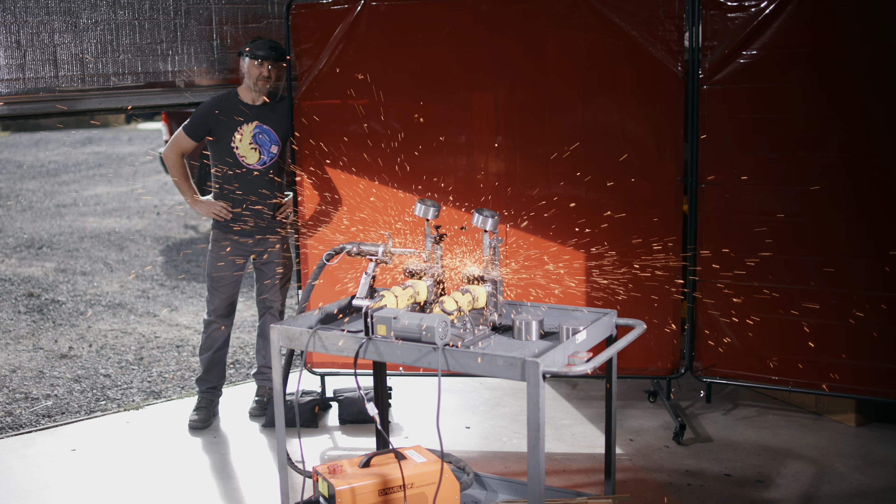This is my Disc Destroyer. It's a mean little machine with one job: testing grinding discs. With so many grinding discs and countless reviews, it's hard to separate fact from fiction.

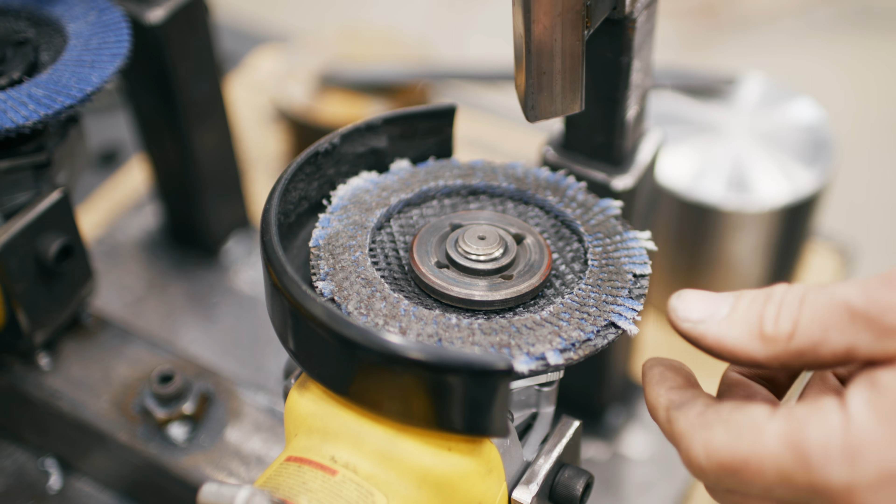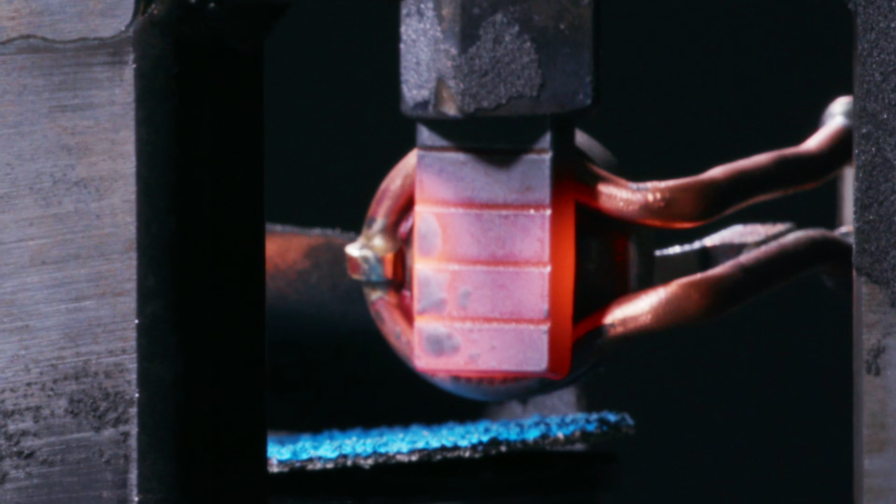This is where the Disc Destroyer comes in. It cuts through the noise, delivering real results. No bias, no sponsorships, just cold hard tests. Grinding discs can face a lot of real-world challenges, like high and low pressures, hot and cold materials, and of course, fast and slow speeds. This machine tests it all, so that we can finally find the truth in the reviews.

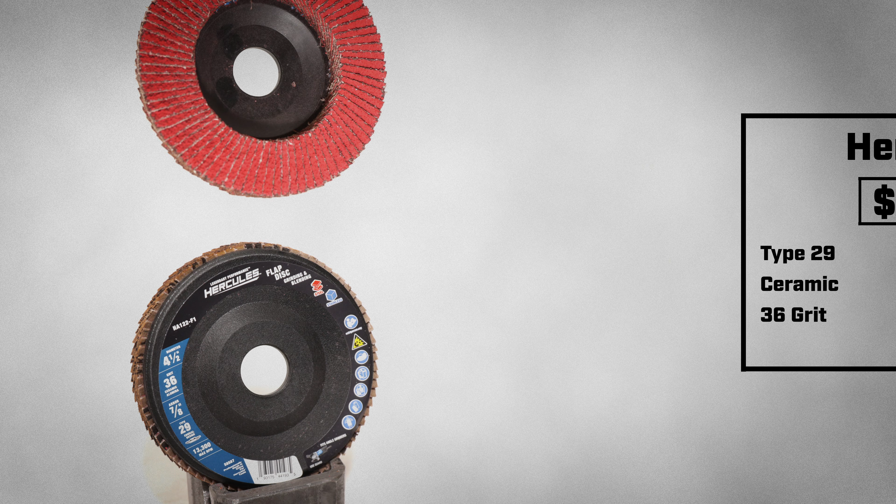Today, I'm testing the Hercules Type 29 flap disc, coming in at $9.99. This is a premium-priced disc. It has netted a wide range of reviews online. Satisfied customers praise its durability and effectiveness. This reviewer gave the disc 5 stars, saying it lasted a good long while and cut quickly.

But critics of the Hercules say otherwise. This unhappy buyer says their disc wore out very quickly, and this reviewer says it didn't last nearly as long as they expected. So which of these reviews are fact and which are fiction? Let's test them to find out.

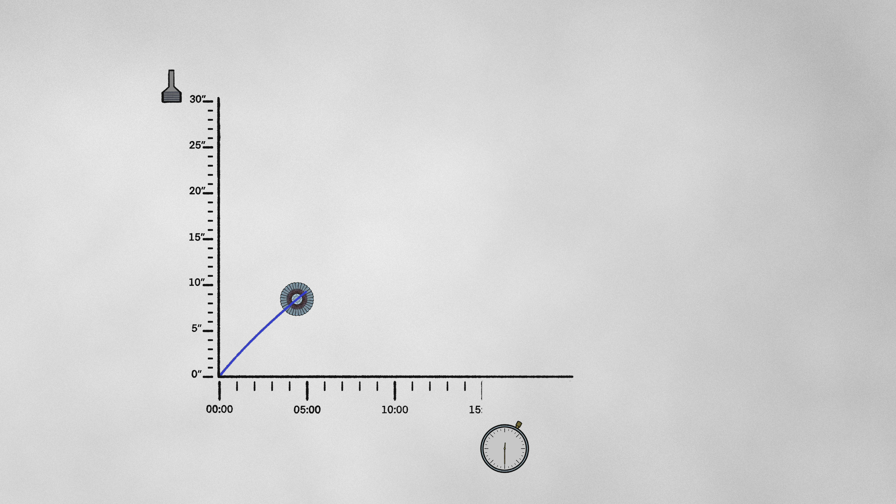Let me break this down for you. Each disc will be grinding this test bar to see how much it can remove within 20 minutes time. This will chart out its story and tell us exactly how this disc behaves based on how much material it removes at any given point. But if the disc stops effectively grinding the bar or just straight up disintegrates, the test is over.

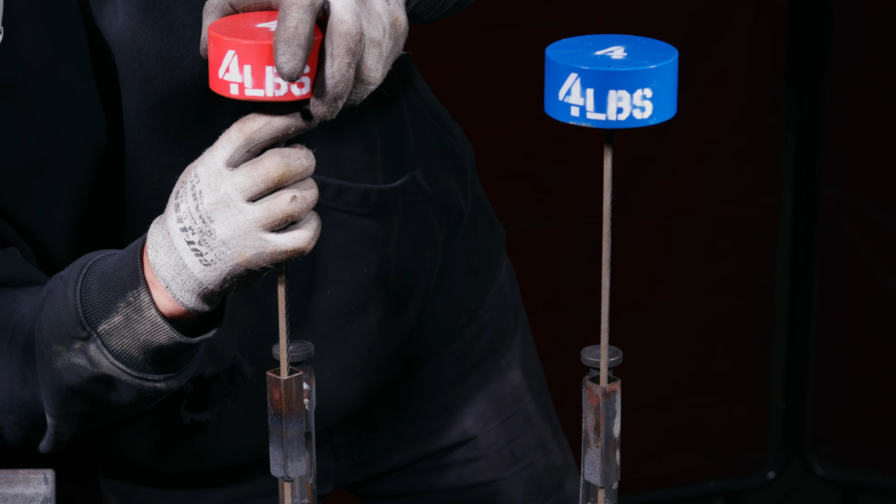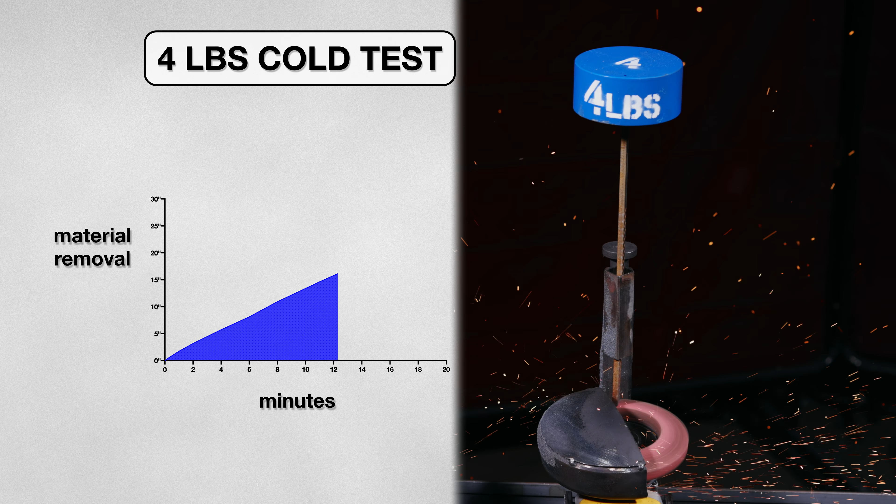Let's begin. I kicked off my first round of tests by simulating light pressure grinding. I achieved this with a 4-pound weight, which is roughly the weight of a grinder. And these conditions gave some very impressive results. The Hercules disc really lived up to its name, surviving the entire 20-minute test window and showed absolutely no signs of slowing down. At the completion of the test, I took a look at the coupon and measured a whopping 25 inches of material removed. These results align nicely with this 5-star review.

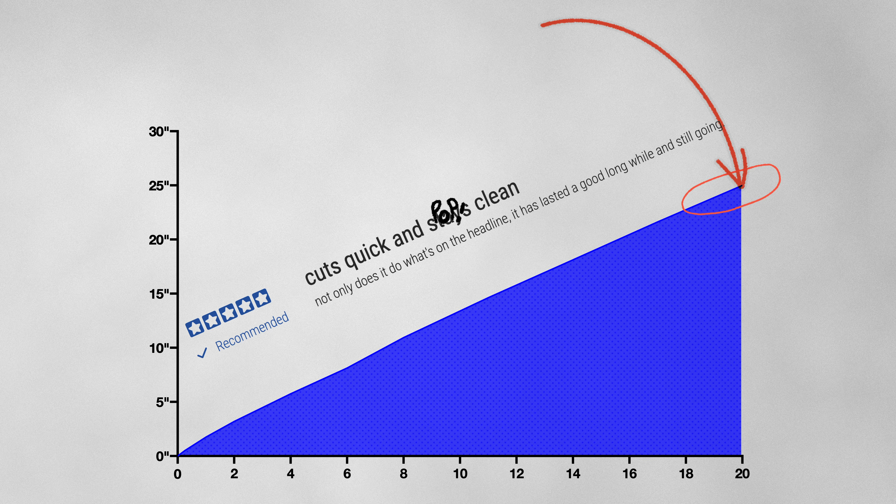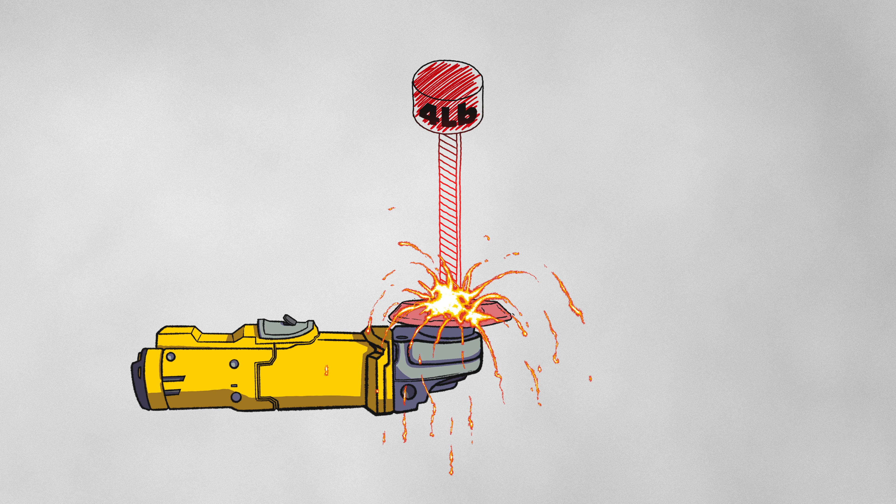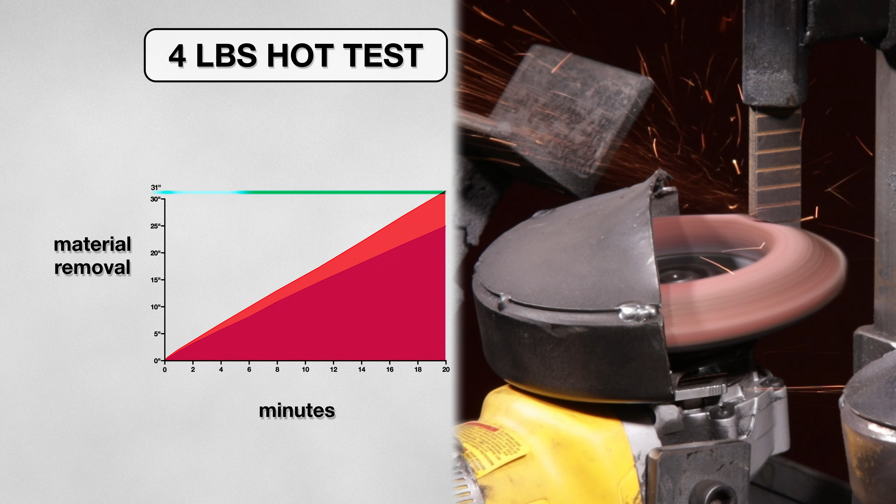However, some reviewers were seeing much worse performance out of this disc, and I want to try to replicate this. One factor could be the temperature of the material. A hotter metal could make grinding easier. It could also increase the temperature of the disc, causing smoking. To test this, I heated the first few inches of the coupon. And yet again, the Hercules powers through like it was nothing. The disc did even better this time, going off the chart, removing 31 inches of material over the 20-minute test. It seems hot metal actually helps this disc.

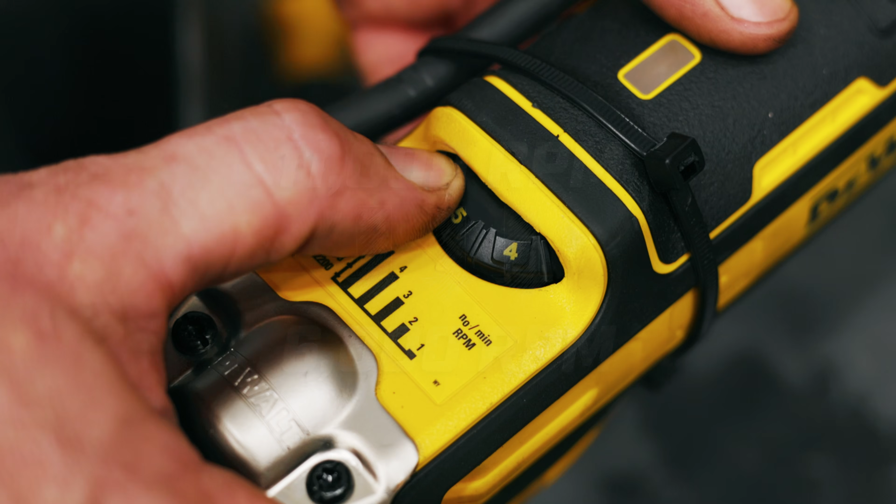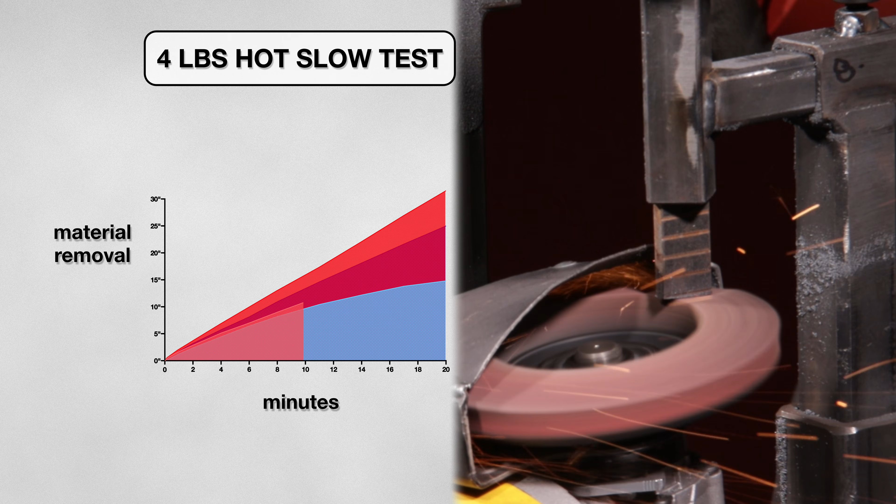Another factor in poor performance could be grinder speeds. To see if this is causing those 1-star reviews, I dropped my speeds from 11,000 RPMs to 6,000 and began my next test. And this proved to be somewhat true. At slower speeds, the disc cut at half the rate compared to previous experiments. Yet, its durability remained high, lasting the full 20 minutes again. Despite changing the conditions, this disc continues to impress.

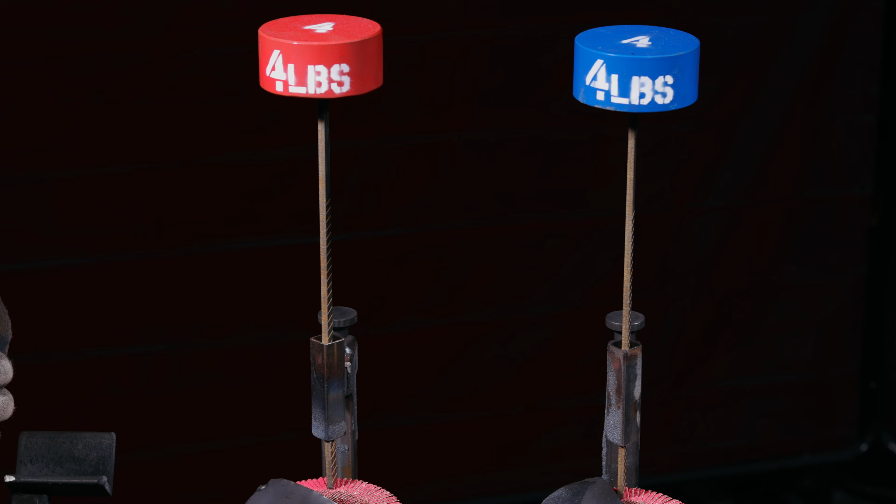There is another element we can change, and that's grind pressure. So I raised my speed to 11,000 and swapped out my 4-pound weight for 8. With the added pressure applied, I began to see this disc's weaknesses. Less than 3 minutes into this test, the disc began to smoke and show signs of uneven wear, ending the test. These results are lining up with the more critical reviews.

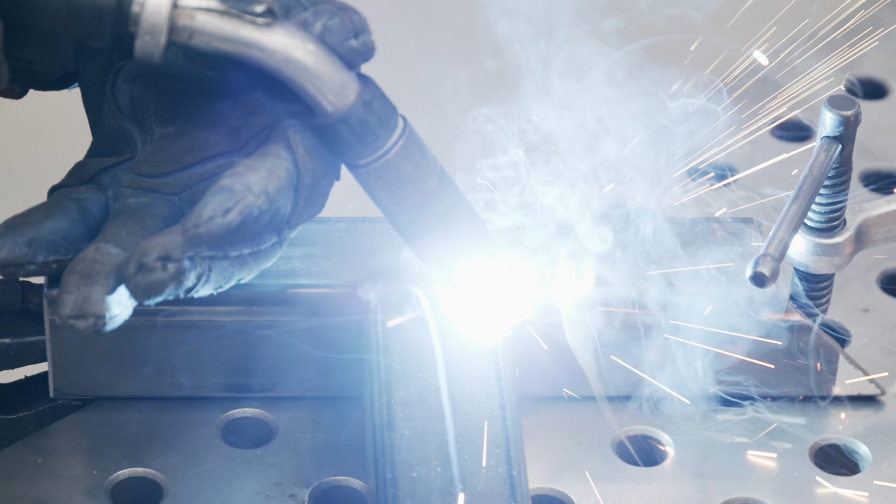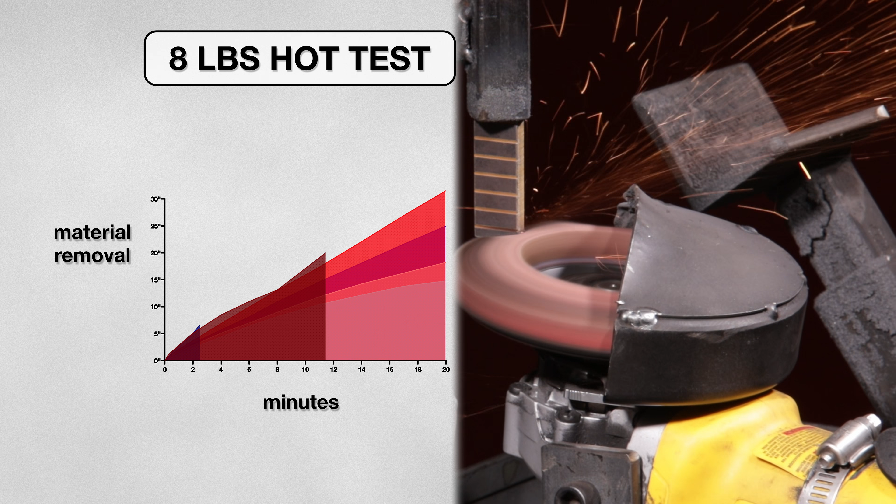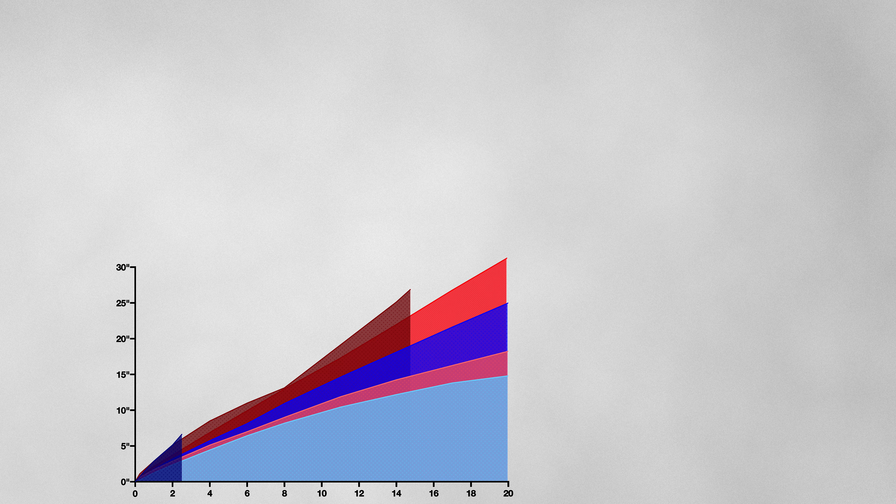So how do the reviews hold up? According to the data, I would say positive reviewers were likely using the disc with light pressure, getting the most out of durability and removal speeds. Even using the disc at a slower RPM still yielded pretty good results. Negative reviewers, however, were likely using too much pressure, killing the disc incredibly early.